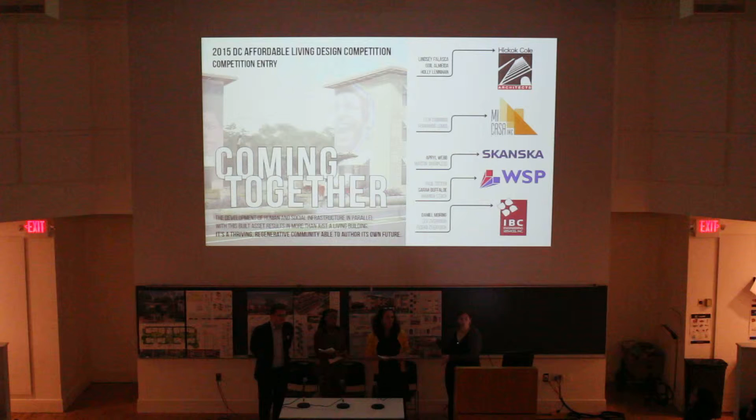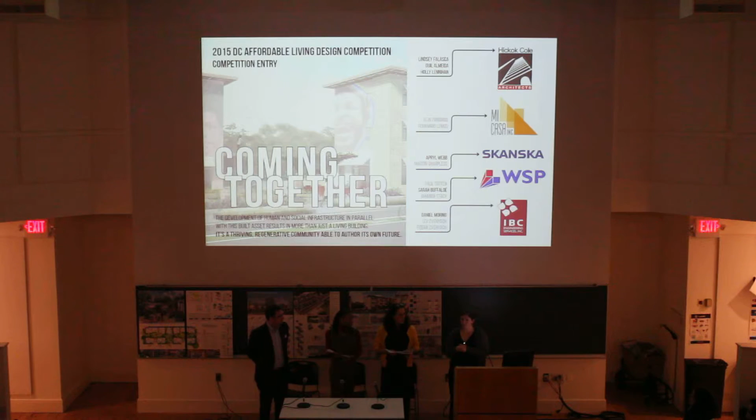April Webb is with Skanska. She did the pre-construction services and pricing efforts for us. We also partnered with WSP, who is essentially our envelope consultant. And then Daniel Mooring with IBC Engineering, who provided MEP services as well as some financial infrastructure information.

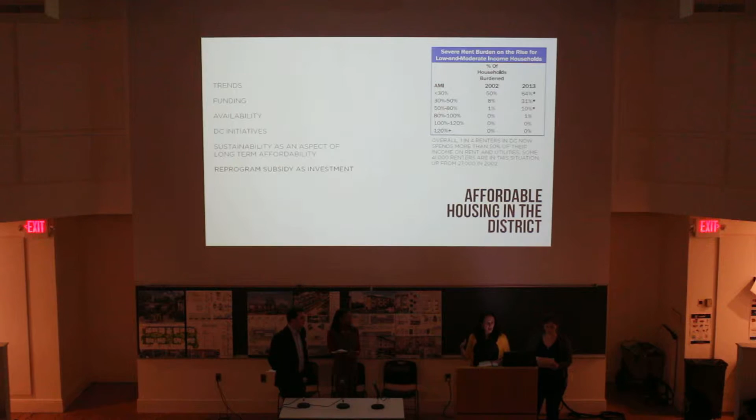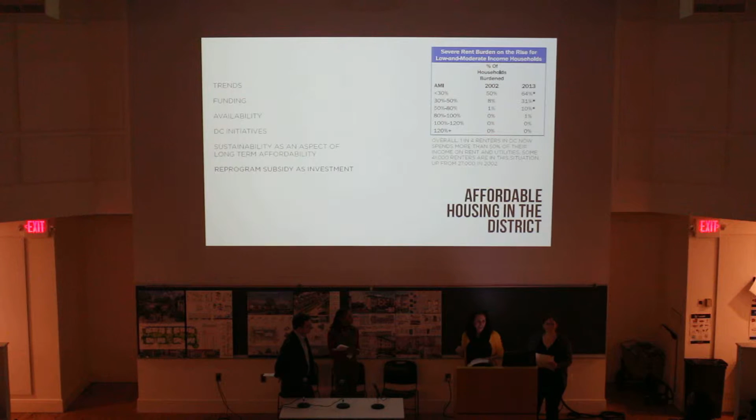I think we all recognize that pressures on development in all of these neighborhoods, which may originally have been affordable, are getting greater and greater. So maintaining affordability is key to the city for many of us. And so that's the challenge. I will say that early this year, the mayor committed to supporting affordable housing, and $90 million were committed to about 12 projects. So the good news is that we are in a city that's committed to affordable housing. I think we have people in the audience that share that view. So that's one piece of the puzzle.

Yeah, so at the same time, there's all this pressure on affordability. Just the very presence of affordable quality housing we thought was really important. So we tried to maximize, put in as many units as possible and make them all affordable as part of the social equity component of sustainability. And as we know, the district is certainly a leader in sustainability and has very ambitious goals that we have been making progress on incrementally, but to really get to the ambitious carbon reduction and energy reduction targets that we wanted, it's going to be complicated because of the nature of the district's economy.

So in order to not make this a zero-sum game, if we're going to continue to have places like Washington Hospital Center, which is a huge user of energy, and still meet the overall district-wide sustainability goals, it means that we have to take whole blocks off the grid. And that's really how we approach this question, going really beyond code and also trying to defray the cost premium of that.

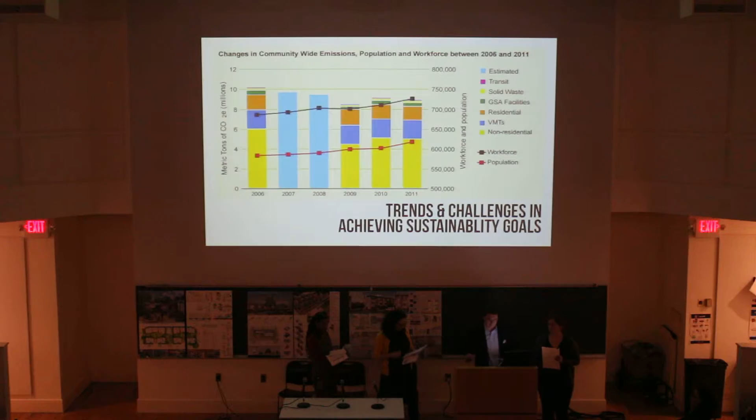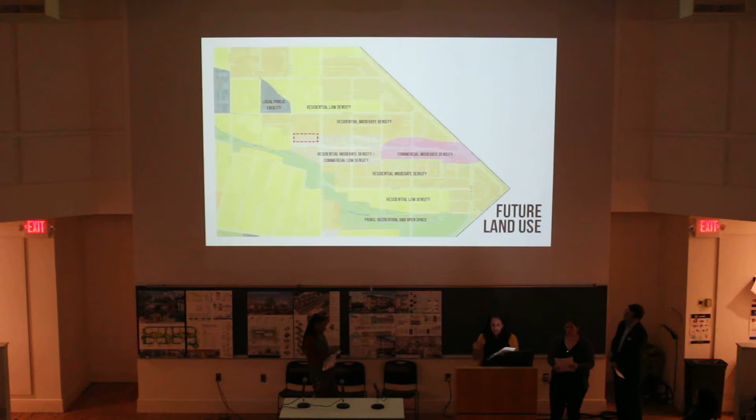Here again, fortunately for us, the Office of Planning has done a lot of work to look at all of the neighborhoods around the city and to figure out ways in which we can project forward in their development. What was very interesting to us is the pink zone of commercial development. We saw our project site within that context, that Dix Street itself had this potential to bring some retail down, at the scale of a corner store, but we wanted that to be part of our story and part of the way that we thought about the site.

And there are a few strategies in DC that are particularly meaningful to use and incorporate. The first is passive solar heating. The second is thermal mass effects. And lastly is natural ventilation. So if we can incorporate all of those strategies into our design, the times of the year in which we need to use mechanical cooling is greatly reduced. And that, of course, helps with the net zero goal.

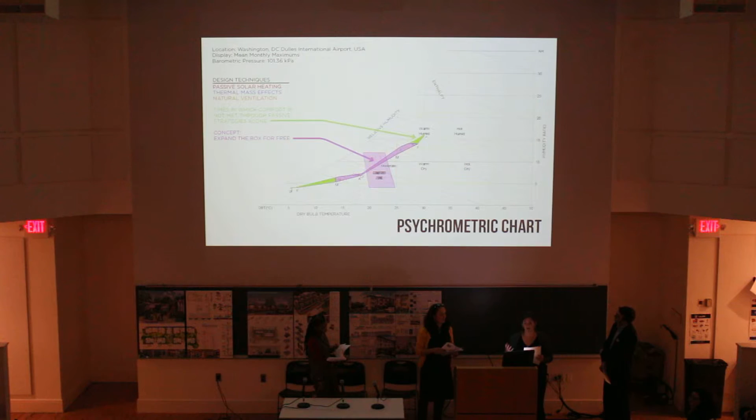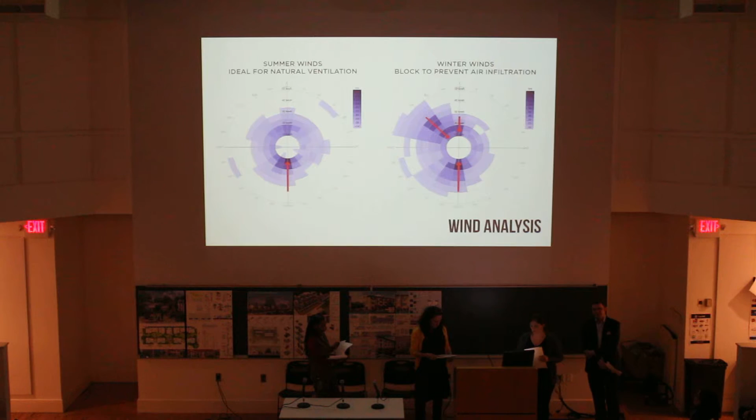Great, and then, after we tried, through design, to minimize the need for energy and water, we had to really look at what the site was itself and what it could provide, because we couldn't have anything that wasn't available on this 32,000 square foot lot. So I looked, based on historical climate data, at precipitation, both annually and monthly, to determine the carrying capacity as far as energy and water on the site goes, and it was tough because residential uses consume a lot of water. The average American uses 100 gallons per person per day, but we only had about 720,000 gallons that fall over the course of the year.

At the same time, it was about 142,000 kilowatt hours that were recoverable, if we just blanketed the entire place in solar panels, which was obviously not the design aesthetic, but that established our bounds so that we could then overlay the supply curves on what the demand curves would be for the building, and then use design and technology to try to mediate those two things.

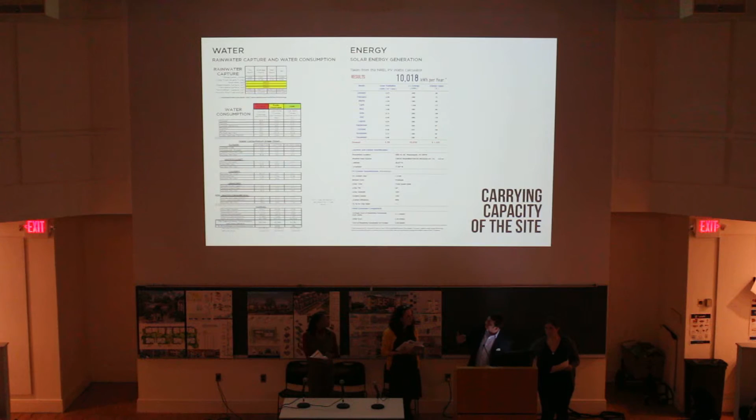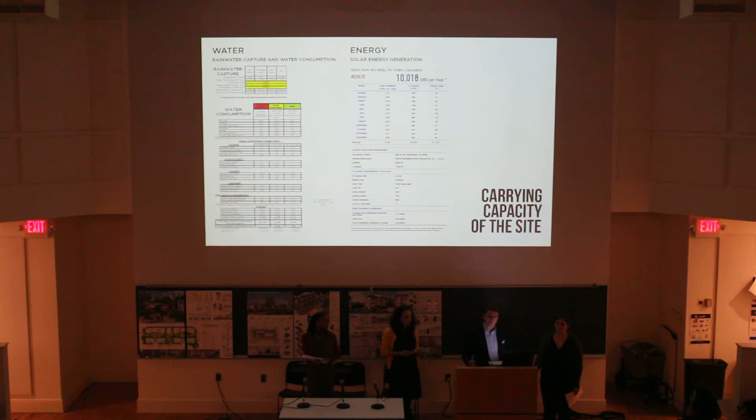And overwhelmingly, what we're trying to do is really flip the concept that this is something that was being given; rather than a subsidy, it's a source of investment that we can make an actual asset for the people that live there. So reprogramming energy subsidies and housing subsidies into actual sources of wealth.

So just to get a little bit more specific again, the variability of the water flow meant that we would have to capture as much rainwater as we possibly could and store it, and then use it for potable and non-potable purposes. And again, through a variety of passive and active strategies, we really tried to cut down the baseline of energy consumption that would be required, because we had to produce more energy than would be consumed in order to be able to store energy for

resilience purposes. But also, because the solar market in DC is so hot, we really looked at that as an opportunity to oversize our system and use the leverage from the very attractive solar credits to balance off the high cost factors that we needed to capitalize just to hit the performance targets.

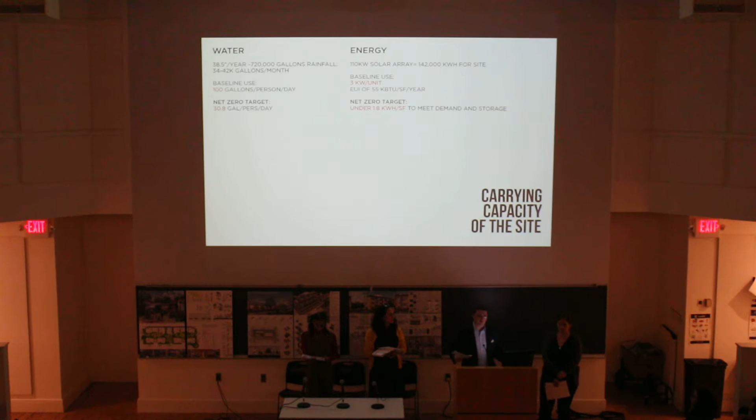So getting to net zero, this is directly from the district's net zero energy financial report, which is a real page turner if you haven't picked it up.

Actually, it is really good. I know the audience here, you guys came out on Monday to an architecture lecture. So.

But the basic concept is that design is better than technology, and by really understanding the place where you are and using the forces that are there, you don't have to actively fight against it. And just from the analysis, which was for a different type of building, a larger building with different applications, 59% of the path to net zero was through deep energy efficiency.

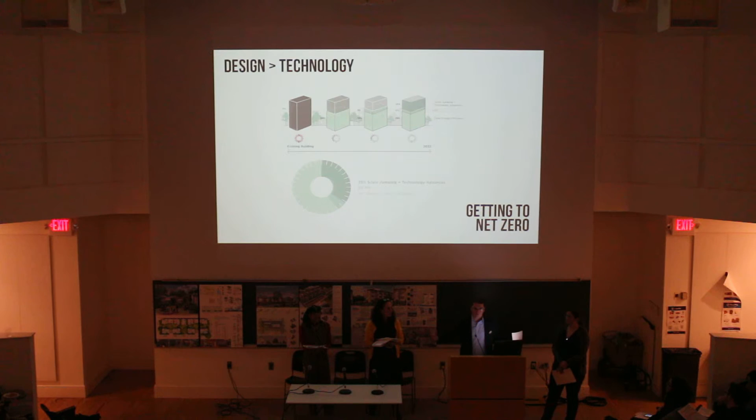35% is through scale jumping, which means going beyond the borders of the site to understand how to better leverage energy. And then only 6% was rooftop PV. So we had to incorporate all of those, and we'll tell you all about it. Yeah, that's right. We're trying to limit how many times we went back and forth.

So here again, the approach we wanted to take in terms of creating these single units, these 15 townhouses, was to make sure that the materials that we put into them and the way that they were designed would, over long term, serve the residents well. So it's part of the sustainability.

And I think one of the important things to note is that a living building is especially important for affordable design, because the idea is that it's not just affordable to build initially, but that it's affordable over the long term. So you can prevent people from having to pay an energy bill or a water bill, and that the materials last longer. There's less replacement that has to happen. So that's how you achieve affordability over the long term, which is great, and how the Living Building Challenge relates to that.

And so then looking specifically at our site plan design, we wanted something that really respected the urban fabric of DC. So we lined the block with our townhouses. It was important for our developer that we did include parking, even though it seems sort of unsustainable, but from a market perspective, that's something that is really desirable. But we did buffer the parking area from the townhouses with a constructive buffering.

We have two public spaces or gathering spaces. One is on the southwest corner, which is more of a public space. The second is towards the northeast corner, which is a little bit more insular and meant for the residents of this development to use.

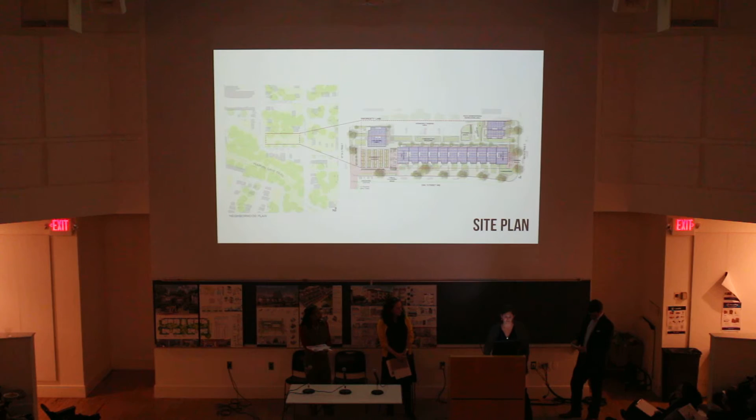As Holly mentioned earlier, our site is connected to the trailhead, the Market View Trail. So the community garden that we wanted to use is on the southwest corner, directly connected to that bike trail. Knowing that we were a bit removed from other sort of amenities, we thought the bike trail would be a nice connection to make to the surrounding area. We also have an outdoor gathering space for the community with tables and chairs.

And I should have also mentioned that we have 15 townhouses that line the block, and 3 of those units are specifically designated as live-work units. So the idea is that the ground floor is a flexible space that can be altered over time as a future land use plan to show that this street is meant to be a residential or a retail corridor in the future. So this particular open space is flanked by those live-work units with the idea that in the future, those ground floors can then be converted into small mom and pop local retail.

And then the more insular open space meant for the residents specifically has a horseshoe pit, quiet green space, and we also have a separate structure that houses all of our mechanical systems. And this is really a big part of our idea, that that structure actually speaks to a lot of the educational components. There's a dashboard that will read readouts of how much energy each house is using.

It's got glass, it's going to be color coded, so that it would help the residents understand how much energy they're using and therefore create this competitive loop where they start to use less because they see how much their neighbors are using. And then on the southeast corner of the site, we also have that third live work unit and a small open plaza space so that when that street does get developed, it speaks to that.

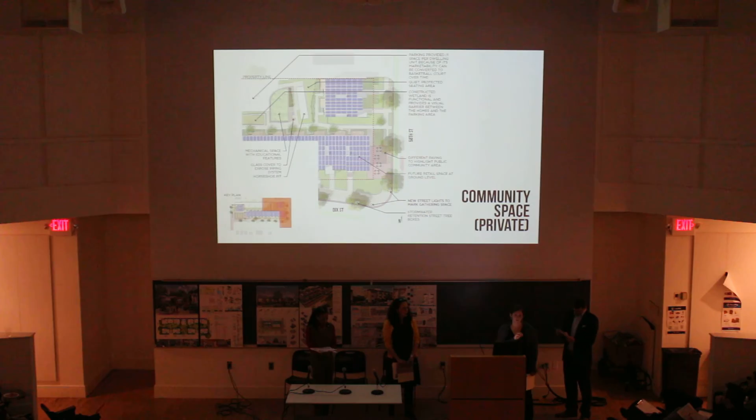And then for the design of the townhouses in particular, we looked at vernacular design. So what historically has DC done and what can we do to work with that but in a more modern way. So the fire